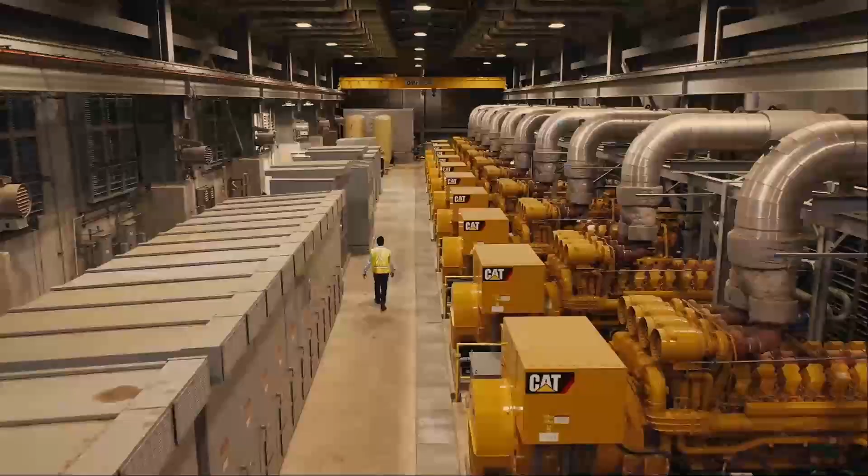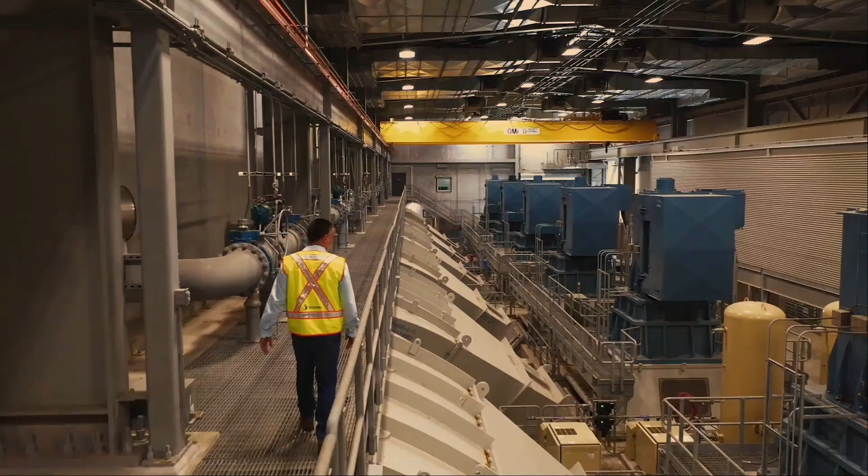The demands on our water resources and pressure on our water infrastructure have never been greater. The combination of rising costs, an aging workforce, deteriorating infrastructure, and impacts of climate change has made managing our finite water resources one of our great present-day challenges—one that requires intelligent planning and operational efficiency. As an expert in water management, the world is looking to you to get this right.

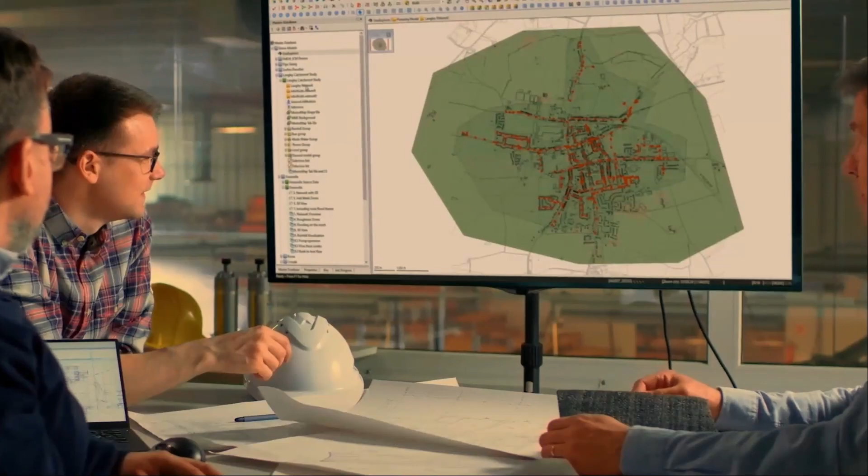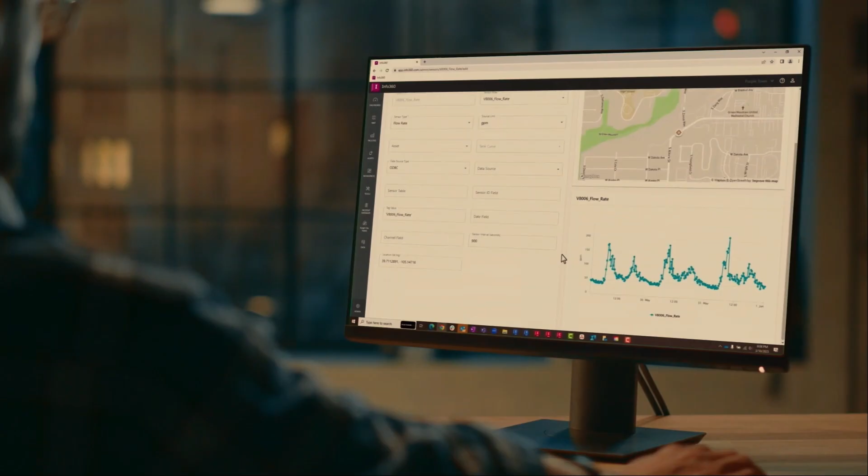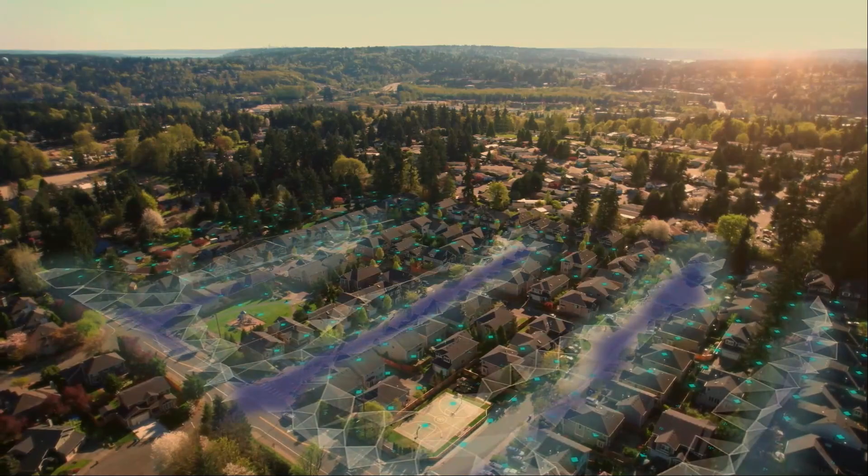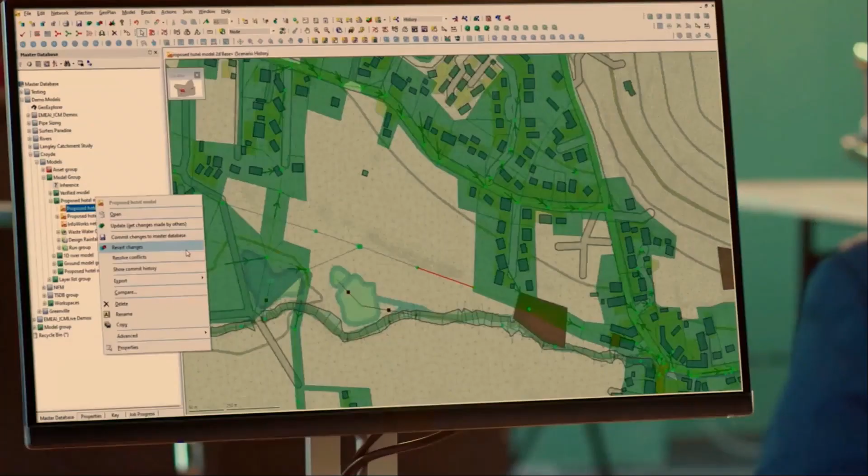Whether the challenge is too much or not enough, Autodesk is here to help you manage every drop with comprehensive technology for all your water infrastructure needs—from stormwater to wastewater networks, treatment plants to distribution systems, asset management to data analytics—we can help reduce risk while delivering reliability, dependability, and performance. By utilizing Autodesk's end-to-end software solutions, you'll find efficiencies spanning all phases of the water asset lifecycle: planning, design, construction, operations, and maintenance.

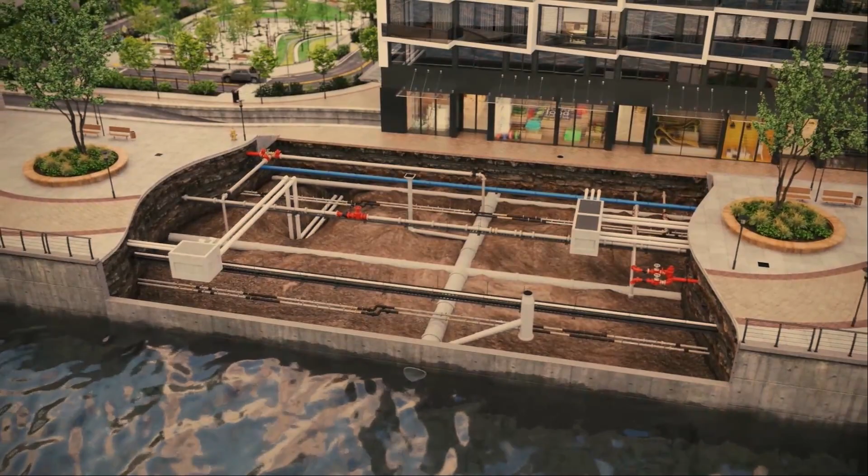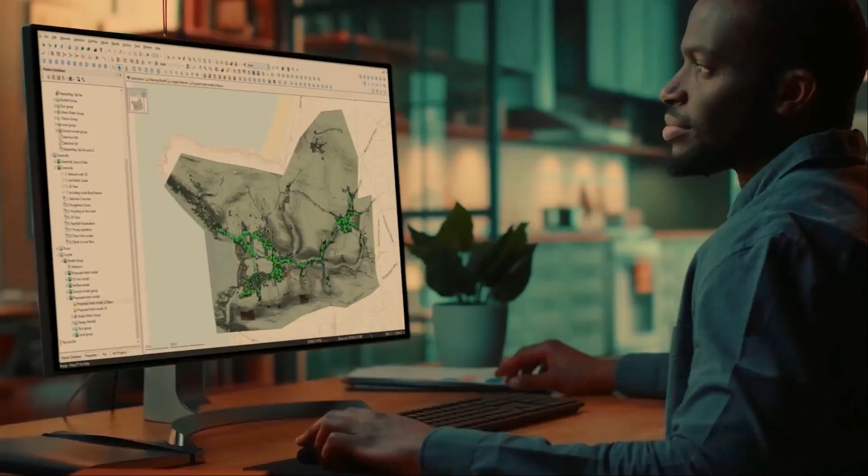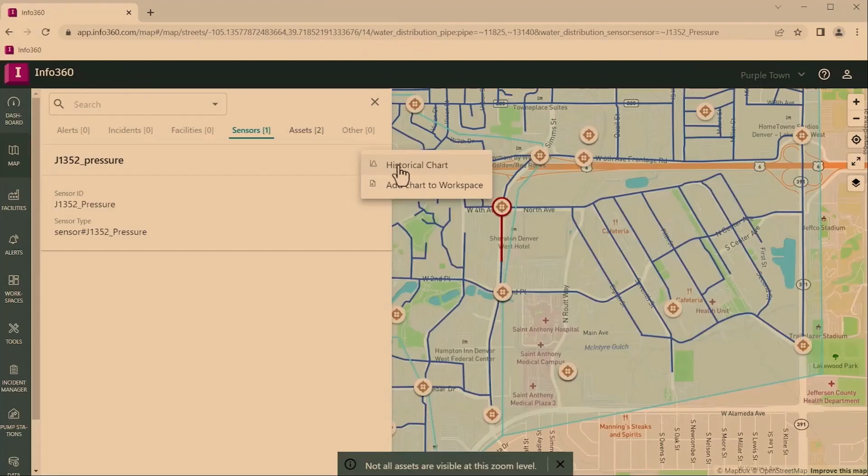Autodesk's digital modeling tools and cloud-based solutions support increased collaboration while reducing design time and rework, helping you create, analyze, and manage a resilient water infrastructure more efficiently and with better quality. Optimize land use with advanced design tools for sustainable drainage. Limit environmental and community impact with improved stormwater and wastewater planning and management. Deliver reliable and safe drinking water through better analysis. Improve operational efficiencies and system reliability through data analysis and optimization. Make informed decisions with streamlined asset condition, risk, and rehabilitation planning. These comprehensive technologies will help you get better, more desirable outcomes to ensure that water is everywhere it needs to be.

In terms of the Autodesk Water offerings, it's good to look at some of the challenges that have been faced. If you've been close to home, I appreciate some of those aspects raised in the video you just saw. But if you think about what's going on at the moment, there's two things putting a lot of strain on different organisations across the UK: whether that's the poor weather we've had, all of the flooding, the water that's just in completely the wrong place, or whether that's looking at the water infrastructure we have and how old and antiquated it is. There's a lot of investment going on at the moment within that water distribution, but also drainage and storm design.

So I think it's really important to understand some of the key benefits or key areas that we should be focusing on and what some of this technology does, in terms of being able to innovate and make sure we are harnessing the best of the technology to really have that informed design. That's sort of what you're starting to see with this case study that's been produced by Autodesk. Being able to harness information to make innovative decisions, informed decision making, but also optimizing your workflow is really important. And when I speak to customers, no matter how large or small, it's about trying to harness data—that's one thing that's going to come up, which Nick's going to expand upon shortly.

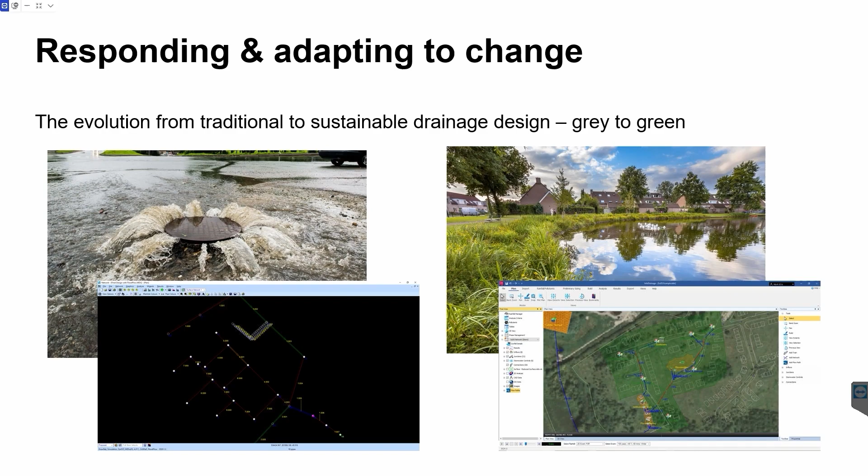As I mentioned already, historically drainage design was about sizing pipes to take the excess stormwater flows from a site. However, there has been a huge industry shift towards a much greener approach. This is called something different in different parts of the world - some common languages appearing, such as green infrastructure or blue-green infrastructure, but it's also known as SUDs or LIDs. Either way, sustainability is a growing demand for stormwater design.

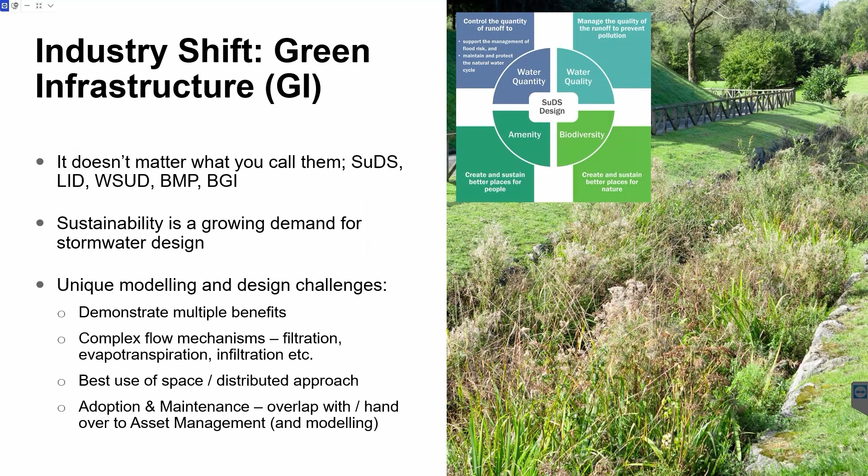So when we're talking about InfoDrainage, I like to link the solution back to some key challenges that we focused on addressing. These are everyday problems, not necessarily new problems, but themes that continue to evolve in the drainage design space. We know we can't complete our drainage design schemes in a vacuum. Never more has data been so important to having a platform to make use of any supporting data, as well as sharing data being key.

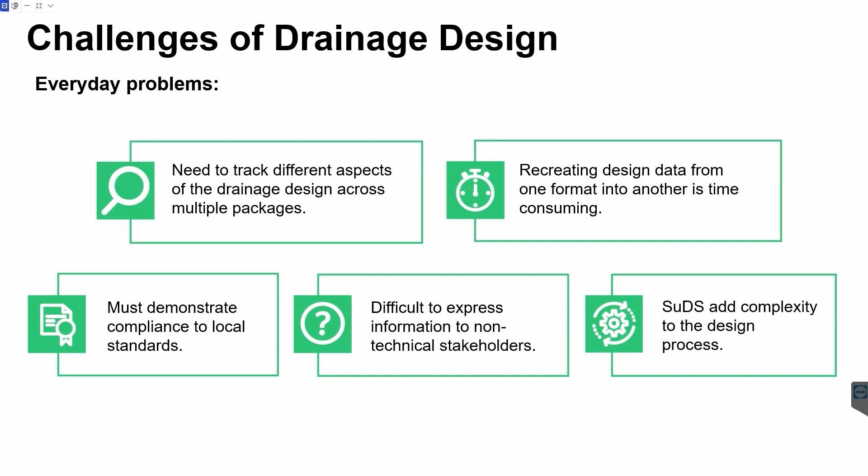So what is InfoDrainage? InfoDrainage is our next generation drainage design platform with a graphical interface, highly detailed SUDS analysis, and also streamlined workflows. We've built it so that you can design creative, sustainable drainage structures as true to life as possible, as well as improve your ability to model and communicate increasingly complex drainage systems.

Innovyze and XP Solutions have a long history in drainage design. Our MicroDrainage product goes all the way back to the 80s. Since then, our innovative drainage design solutions has continued to lead the way, used by lead local flood authorities, house builders, and consultants as well. So we've taken all that research, development, and industry knowledge, and created InfoDrainage.

InfoDrainage allows you to create traditional drainage, as did MicroDrainage, but also SUDS designs in detail. See your designs laid out graphically and produce customized reports to satisfy drainage design workflows wherever you need them in the world. It lets you define true-to-site structures quickly and effectively to make the best use of space, enable BIM workflows, reduce unnecessary rework of designs, and analyze and optimize the system as one rather than individual structures.

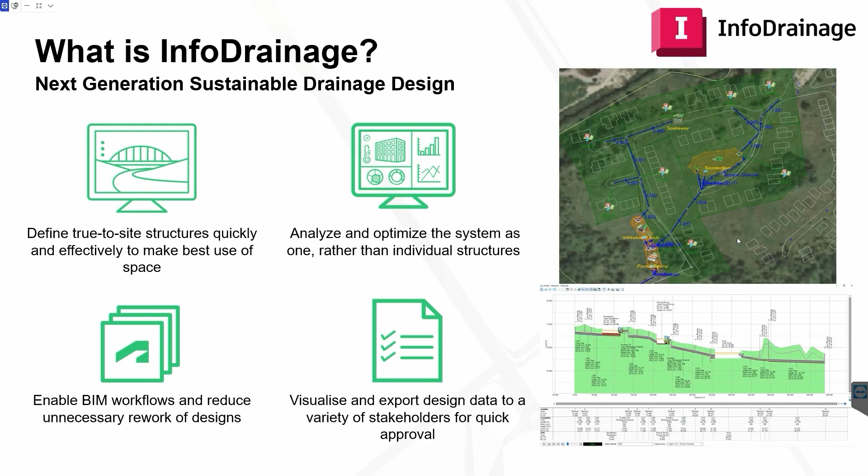So why InfoDrainage? It's about optimizing design and obtaining approvals faster than ever before, compared to what you were able to do with MicroDrainage. So it's sustainable drainage design, project efficiency, full design and analysis, quicker approvals and review, and the BIM workflows as well.

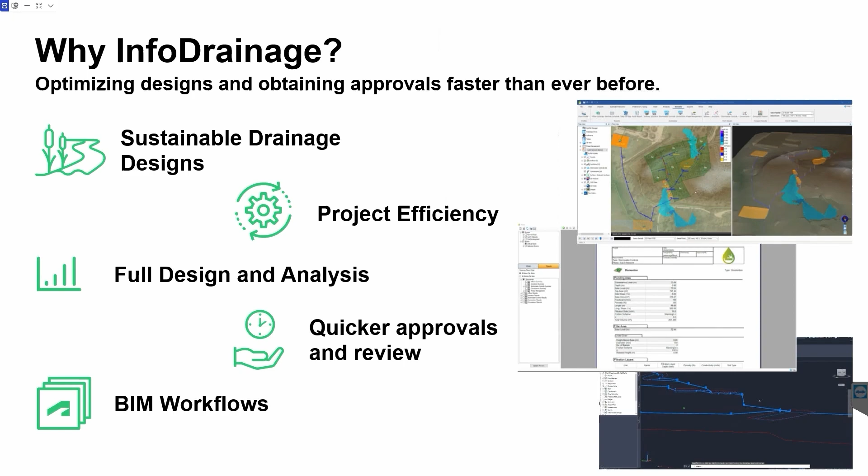What InfoDrainage offers you is a more accurate representation of SUDS. In MicroDrainage itself, SUDS structures in drainage systems are represented as a storage node with no dimensions, so you may have had to create a dummy node to try and represent a SUD. This means that in MicroDrainage, while the SUDS volume is shown, the time of concentration of water flowing through various SUD structures is not. On the left you have MicroDrainage, and on the right you have how you would see that within InfoDrainage.

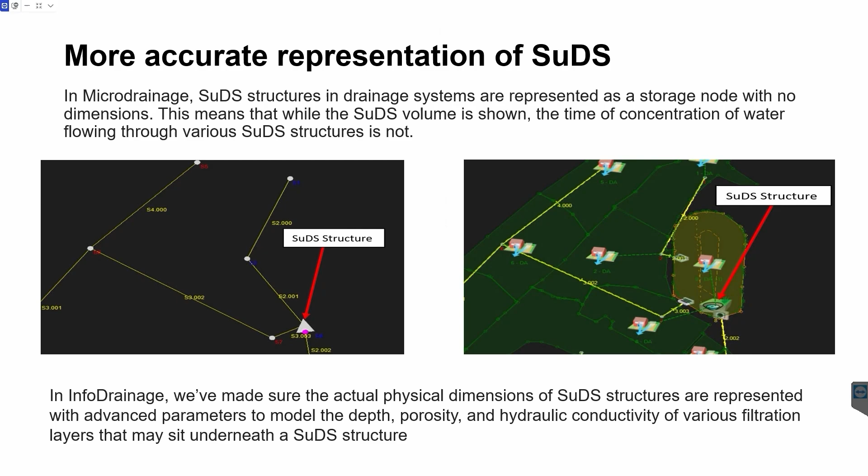In InfoDrainage, we've made sure that the actual physical dimensions of SuDS structures are represented, with advanced parameters to model the depth, porosity, and hydraulic conductivity of various filtration layers that may sit underneath a SUDS structure.

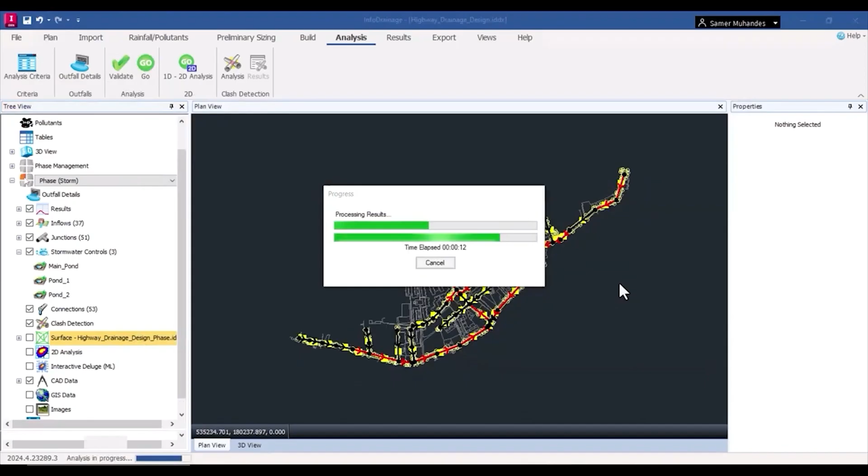MicroDrainage itself did have some integration with Civil 3D through the DrawNet module, so that's not necessarily something new. We had it in place since about 2018 in MicroDrainage. But InfoDrainage itself, even before the acquisition by Autodesk, was looking to push that forward and make it an easier tool to use with that integration for our Civil 3D customers. But that integration is growing.

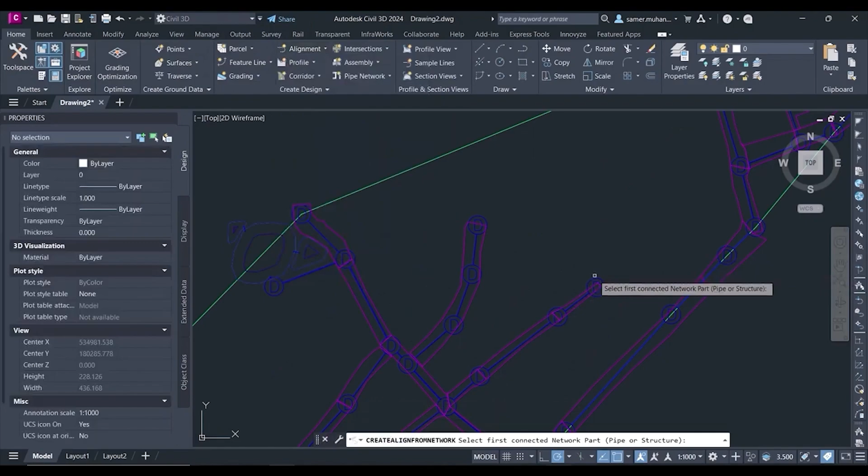Our team of drainage design experts and product developers have made it their mission to solve this industry challenge through expanding the integration as we move forward between InfoDrainage and Civil 3D. So with Autodesk's drainage design solution, InfoDrainage, and Civil 3D being the world's foremost civil design software, we are looking to push that forward.

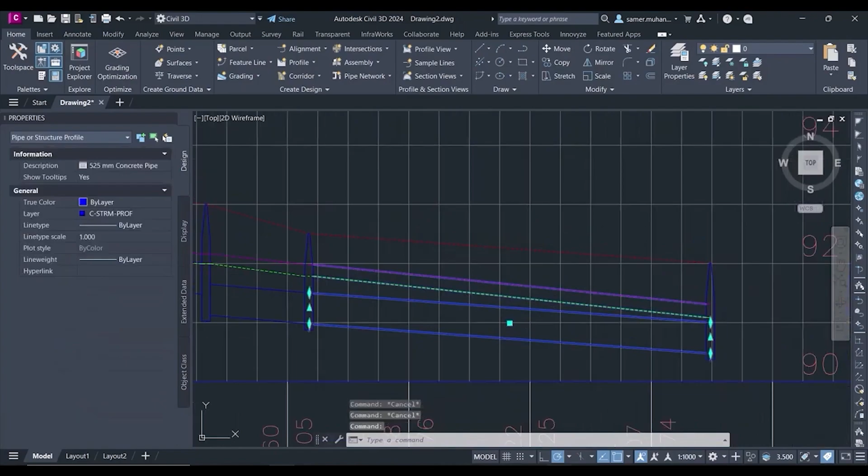As an industry first, InfoDrainage recently added results migration for Civil 3D, meaning that users can directly migrate their physical InfoDrainage models and associated hydraulic results into their Civil 3D models. You've long been able to directly import your physical drainage models from InfoDrainage to Civil 3D, but the ability to connect the actual hydraulic results means you can now achieve a highly intricate level of data with a more automated workflow.

Just going to play a short video now to show you, as we move the software forward, some exciting developments we've made, which is our intelligent deluge flood mapping tool with machine learning technology, which was incorporated within our 2024.4 version of InfoDrainage.

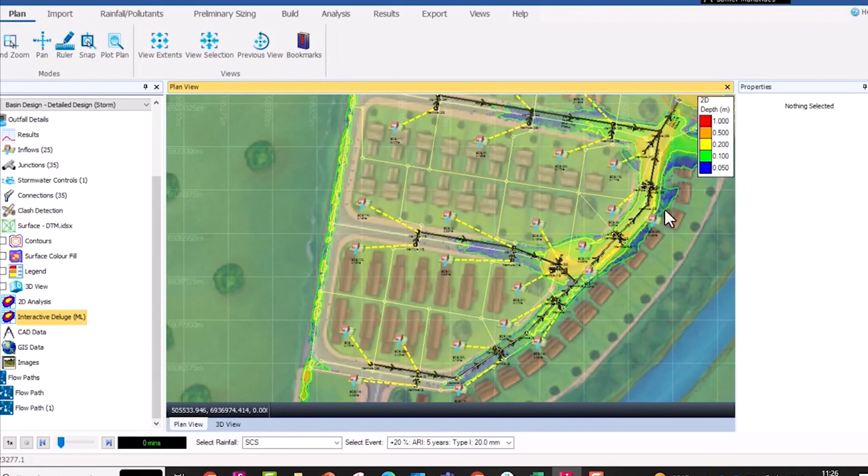Introducing the machine learning deluge tool inside of Autodesk InfoDrainage, tailored to provide unprecedented speed, stability, adaptability, and interactivity in the assessment of flood maps. The tool quickly simulates a depth of water over a surface, generating a responsive flood map indicating locations of ponding and channeling on a given site.

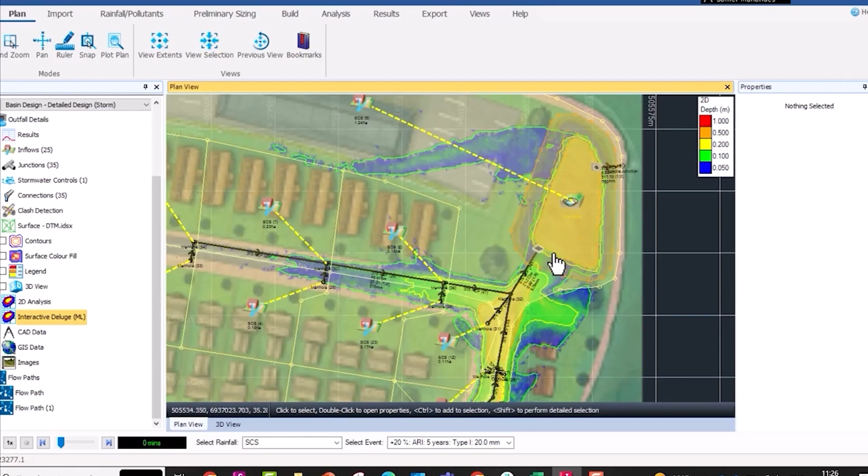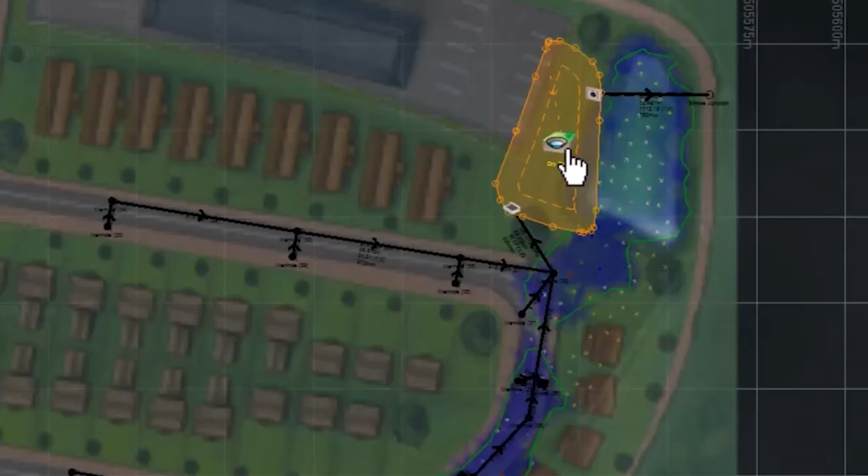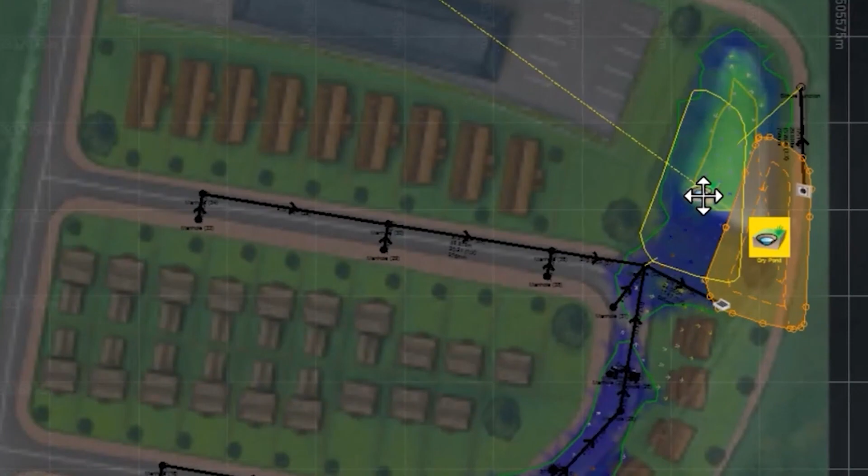By leveraging our machine learning algorithms, this feature will lead to users being able to make responsive design changes, like this example where a drainage designer is adjusting the location of a pond and the flood map instantly responds, indicating how effective that change was. You can see now that with this change, the pond location captures all of the pooled water. This tool will make drainage designs more intelligent, responsive, and efficient.

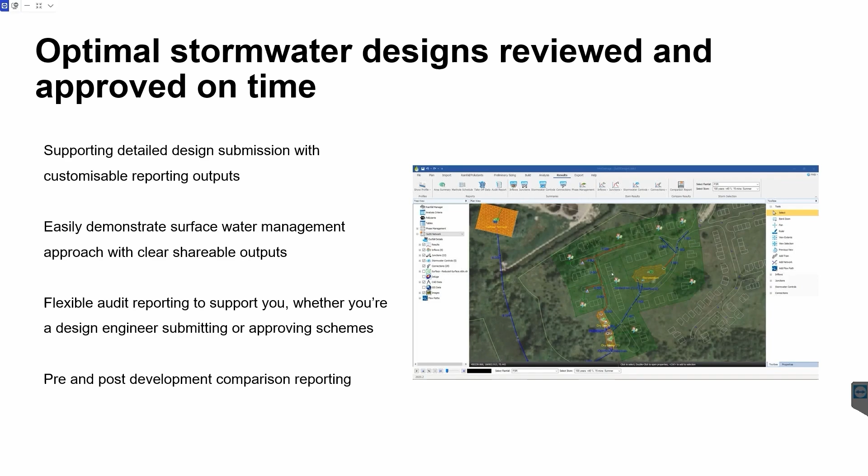Again, with InfoDrainage, the optimal stormwater design reviews and approval on time. We wanted to make it easy for customers to gain approval for their designs, so we're supporting detailed design submissions with customizable reporting outputs. It's easy to demonstrate surface water management approach with clear shareable outputs to get approval, flexible audit reporting whether you're a design engineer submitting approval or approving schemes, and pre and post development comparison reporting is also available. It's much more flexible than microdrainage was in what you're actually trying to show with your reports.

What's new? In the last 12 months we're starting to see the benefit of having access to the Autodesk technology. You can go onto the InfoDrainage Technical Information Hub, which I'd strongly recommend if you're a user of Innovyze products. There's one for InfoWorks ICM, InfoDrainage and WS Pro. You can sign up for updates, but there's loads of useful information on there for what's new.

There's a forward-looking roadmap and an ideas portal. We want customers to help shape the software, so you can go to the ideas portal, suggest ideas, vote on ideas, and see if they're under consideration, potentially already in the software, looking to be added in the near future, or in progress of being added. There's loads of stuff, so it's worth looking at the Technical Information Hub if you're a user of the software.

Some of the key things we've added recently in the last 12 months: the intelligent deluge flood mapping with machine learning technology shown on the video, the results migration from InfoDrainage to Civil 3D, the clash detection analysis for stormwater controls, the cloud analysis capabilities, and the HEC-22 advanced inlet analysis capabilities.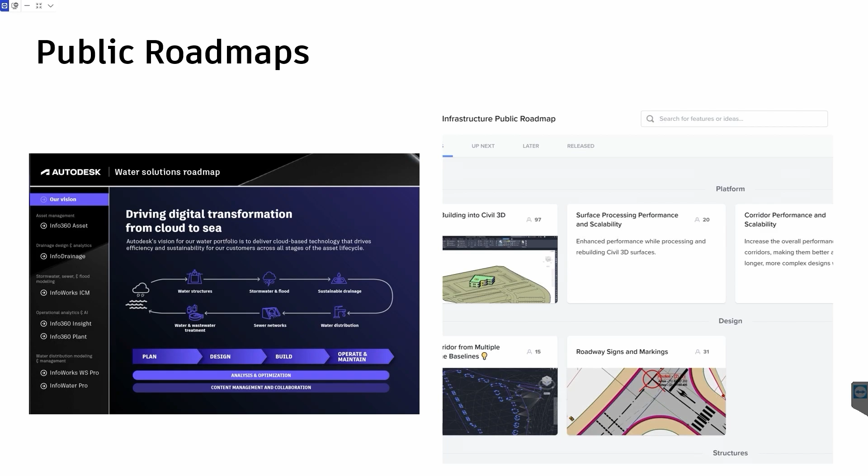As we support our customers, with InfoWorks ICM and WS Pro it's slightly different with the I2S program, because it's very much the same product but a change of licensing and how you would buy the software. Whereas the microdrainage to InfoDrainage move is slightly different because it's moving to a new solution. So we want to do our best to support our customers during that.

There's two ways, I guess. We have a customer success hub with online content. This is a great tool to use if you're evaluating it, or doing the free 30-day trial, which you can download from the Autodesk website on the InfoDrainage page. Then we have this online e-learning course.

It takes a couple of hours, but it was put together from the old microdrainage training team, which we used to have based in Newbury. There's a few modules you can complete in your own time during that 30-day period, or if you've got new starters within the business, or you've just bought InfoDrainage, there's training to support you.

The customer success team, our technical support team, it's still the same guys who've been with us, the guys who would have been InfoDrainage historically, based in our Wallingford office when it was there. They're still the guys you would speak to, experts within anything microdrainage and InfoDrainage. We also offer that previous version option, so if you need microdrainage for historical projects or during the transition into moving across to InfoDrainage, it's available for you to use.